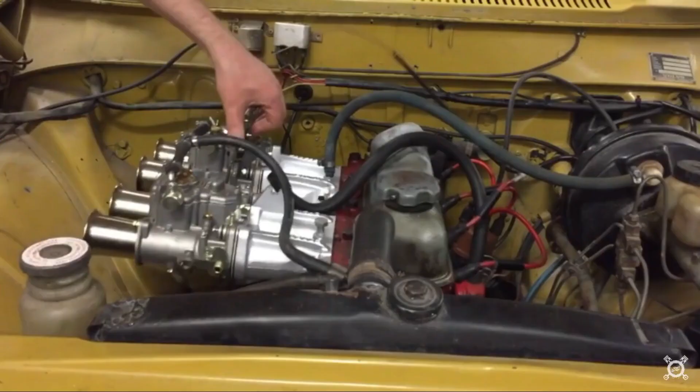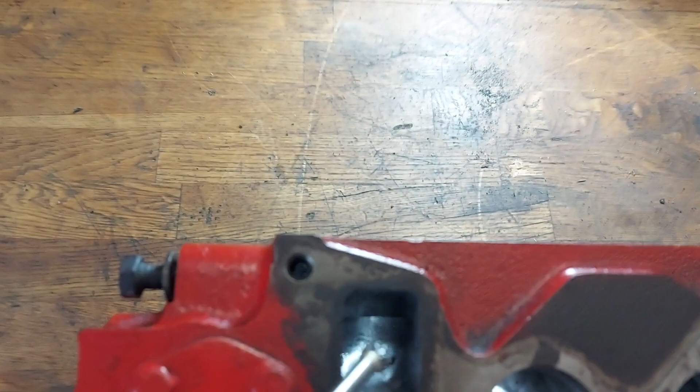And I already have almost finished this first one. You can see there's the original. There's a huge bump there in the bottom of the bowl. And in this port, it's almost gone. But I can feel a small, can I say bump, there on the right corner, so I take a little bit with my new tool from about there, but after that I think this one is ready for finishing,

because in my last video I read from the forum that more is not necessarily better, so I will try to keep the original form, just removing the big bump from there to make sure that the flow is as good as possible. But in the end of this video, I will test also the flow with the heat gun and wool string, like I did in my last porting video, and intake ports are already finished, so I just have to finish this one and work with these three ones.

I think the filming of this video will be long, but the video might be still quite short because I think I will do only one port per day, because I have learned from the masters that this will take time and it's a nerve-consuming thing. So to make sure that the final result is okay, I should not rush with this. So I will use plenty of time to finish this head.

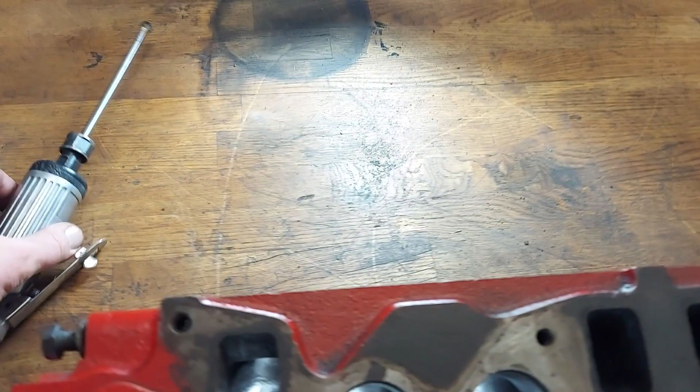Like I told you, I have new tools. I ordered these from UK, and now because of the Brexit, I have to pay the customs. I think the parts were like 40 euros, and I had to pay something like 13 euros, the custom or the tax or whatever it was. So it's a little bit trickier nowadays to order parts and tools from UK, which is a shame, because the market is very good there. Luckily I have still some friends there and they will help me, but I still can't avoid the custom fee, so I just have to deal with it.

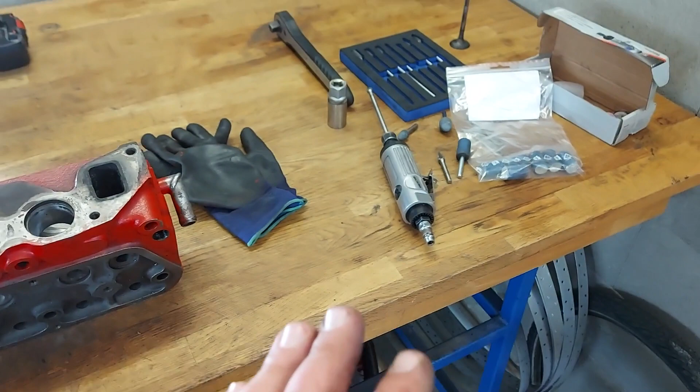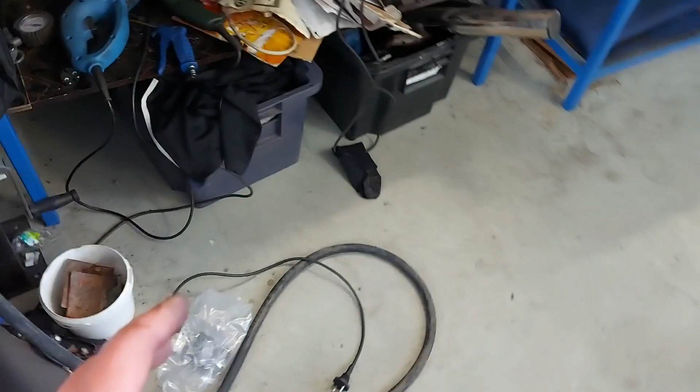But I will use these tools first, and then I probably will use these sanding rolls to finish the job. By the way, I have my air compressor ready. You can see the hose, it's quite heavy duty. I probably will build some piping on the wall, but I think I can manage with this hose at this point. Next I will have to pick up my mask and my glasses and the earplugs, and then I can start the porting.

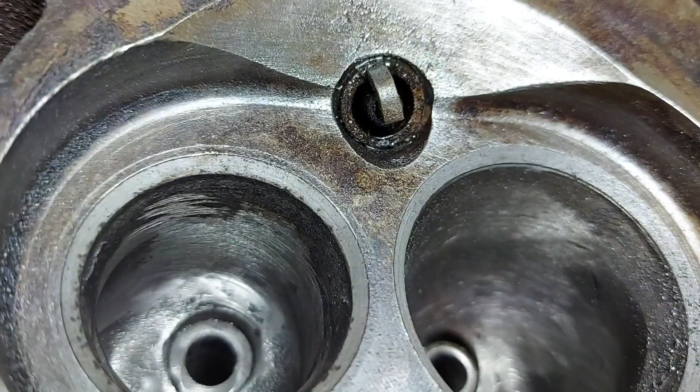Now I think I have finished this one. I can't get it better with my skill and my tools. I tried to finish it with this sandpaper, and I think it's good enough for me. If we check it from this angle, I tried to smoothen it also from here, and now the bottom of the bowl should be a little bit better. I didn't touch the floor, I did touch a little bit only to the top. After porting and the original.

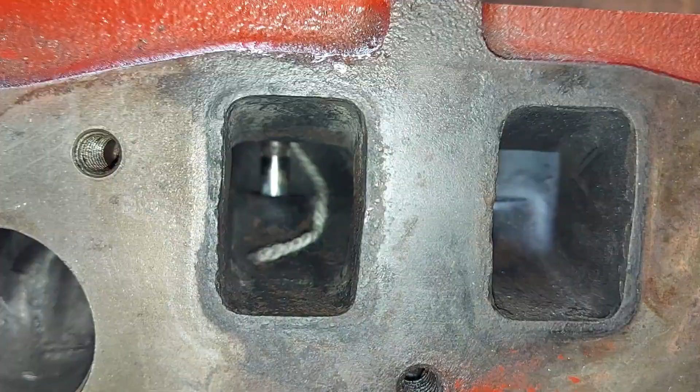Next I will do a short test with heat gun and wool string. This is the original, and as you can see it might be slightly restless, but I will show you the one I just finished. Well, it's quite difficult to say the difference, but at least I want to believe that the flow is now better. It's spinning around still, and now it's stuck, but at least the port is now a little bit bigger.

Next I will put my camera away, and I will start porting this number 2, and I'll be back after I have finished this second one. I think that will be enough for today, and I will continue tomorrow because I don't want to do these in a rush. Next I will put my camera on hold and start working.

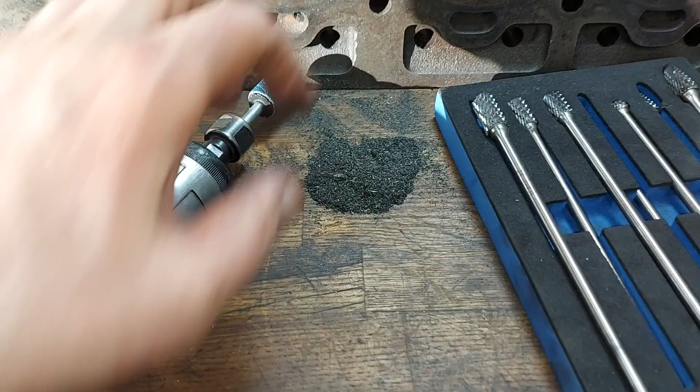But check this, there's a quite big pile of metal here, and it came out from that port. I started with that one, but the guide was still there, so I had to press the guide out. But now I have finished 2 exhaust ports, and the sun is shining, but as you can see, I think it's quite okay.

You can't see it quite well, but believe it or not, now I have finished 2 exhaust ports. So now I will have a small break, and I'll be back tomorrow.

Yes, I have almost finished this head. I have ported all the exhaust ports, 1, 2, 3, and 4, and now they should be ready. Well, they are not perfect, but I think they are good enough for me because there aren't any big shelves anymore. And I think this was my last one, and I think this is the best one.

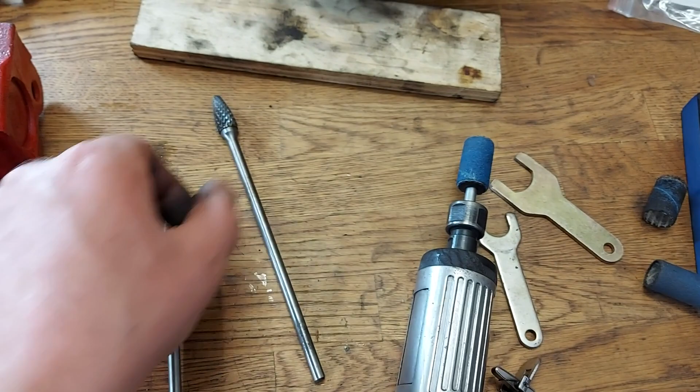I use these. I have this set, and I think this is the best tool for this job because this is big enough, and I can take all the material off, and the shape is perfect for the roof. So I think this was the best. I tried everything, but I think this was the second best. This can reach the corners, this can't.

And I used this plywood also at one point to get some support for the long tool, but I decided to get rid of this because at the end I didn't need it. I can tell you that this is a job where reading and theory are important, but this is a job that I think I have to practice a lot.

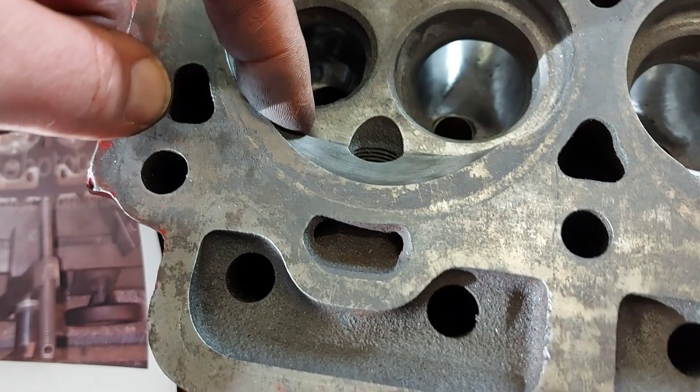Actually, I'm using this at this point to make a new shape to the combustion chamber. This is the original one, and you can see the sharp edge here on both sides. And I'm trying to smoothen this sharp edge. I have already done these 3. I don't know how well you can see it, but there's no sharp edge anymore. Maybe this needs some more attention, but this is original, so I will put my camera on stand and you will see how I will smoothen the edge.

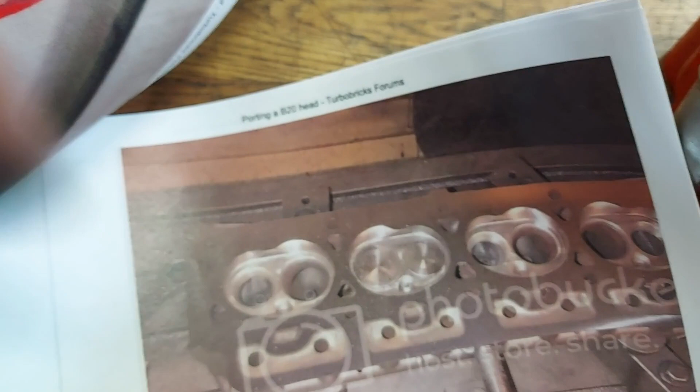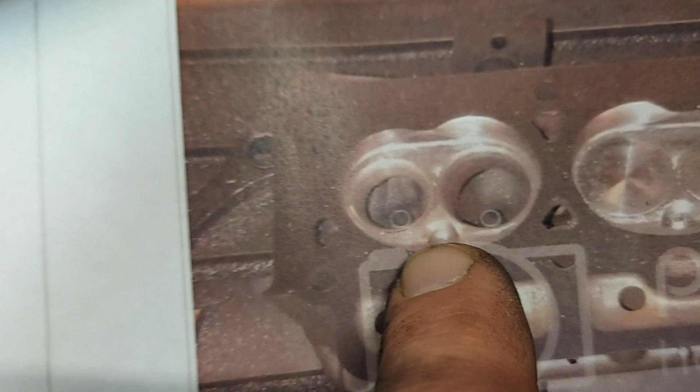This is the picture from TurboBricks forum, and here the guy says that here's the combustion chamber shape that worked best. Okay, the picture is not perfect, but I can't see any sharp edges here, and I think the shape is slightly different also. Come on, my camera. Thank you. The shape is also a little bit changed here, but I will only touch this part of head. Next I will put my camera on stand and I will finish this head. And I think after the last job it's ready for the machine shop.

Job done. Now I have reshaped all the combustion chambers. Well, they are not perfect, but they are good enough for me. And I just took one bolt and one cover off because my plan is now to take this to the machine shop. So I hope they will level this surface also, and of course this, but we will go to this later.

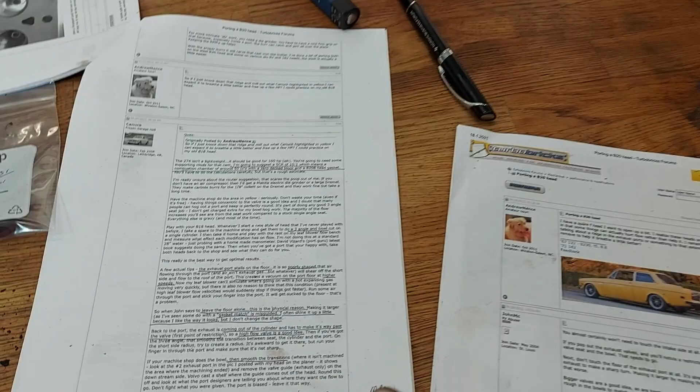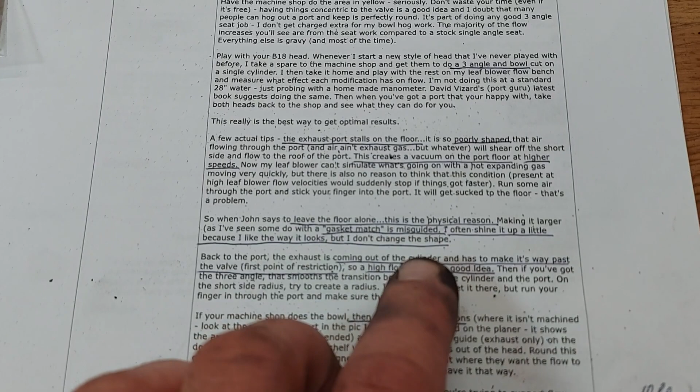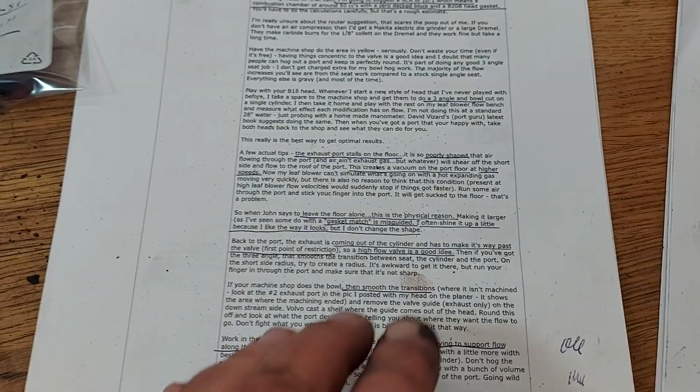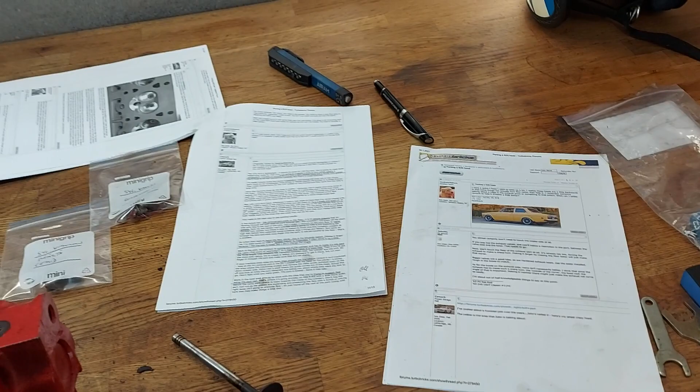If you have watched my earlier porting video, you know the TurboBricks forum, and there's the subject porting a B20 head. So if you want to know more, go there and you can find a lot more information and good pictures. I have been trying to follow these instructions, and I have left the floor alone, and I have been trying to support the flow along the port roof, etc. So there's a lot of good information in that forum. There's 2 guys, John MC and Canuck. I think they really know what they are talking about.

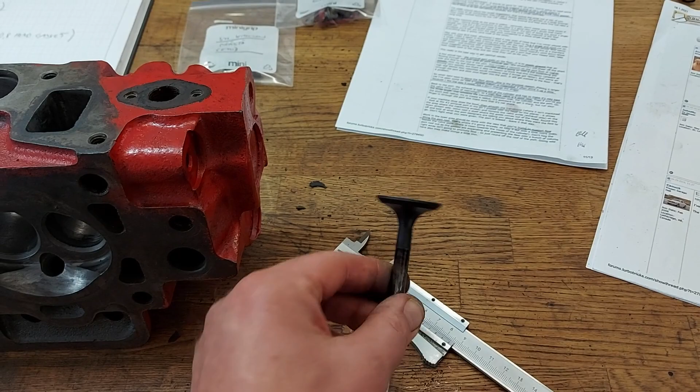But next I will take this to the machine shop. My plan is to get a little bit bigger exhaust valves. These are 35 millimeters and my plan is 38. And the intake valves, if I remember right, are 45, so I will leave them that size, but they will redo the valve area to make sure that the unleaded fuel goes without problem in the future with this engine.

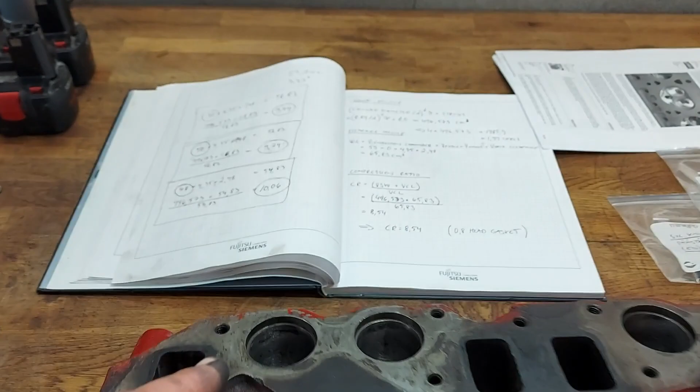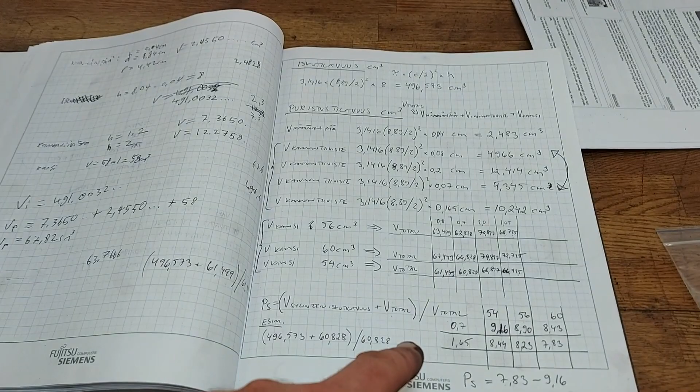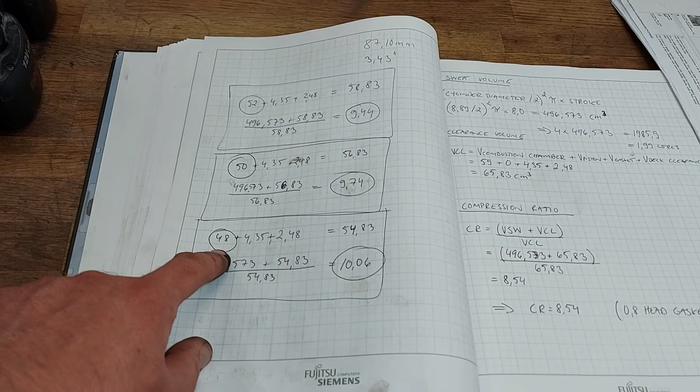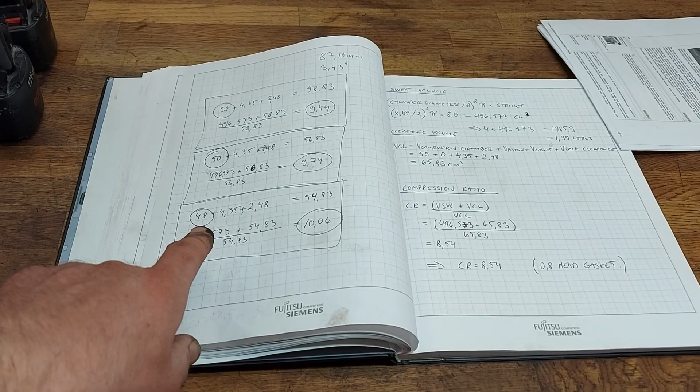And about the compression ratio, I have already done a video about it, and in this engine I already have the 0.8 millimeter thick head gasket somewhere there along the other parts. My plan is to get the compression ratio around 10, and then I would need 48 cubic centimeter volume in this combustion chamber, and they are at the moment about 60. So I hope they can take enough material off the head in the machine shop that we would get the 48, because if it's much bigger, the compression ratio will be lower. But I would really hope about 10.

That's my goal. But like you know, this is my first engine project, my first porting project, and first almost anything. So there's a lot of things that can go wrong. But at this point, I'm quite happy about my porting. It will be very interesting to see how much horsepower we get out of this engine with this head.